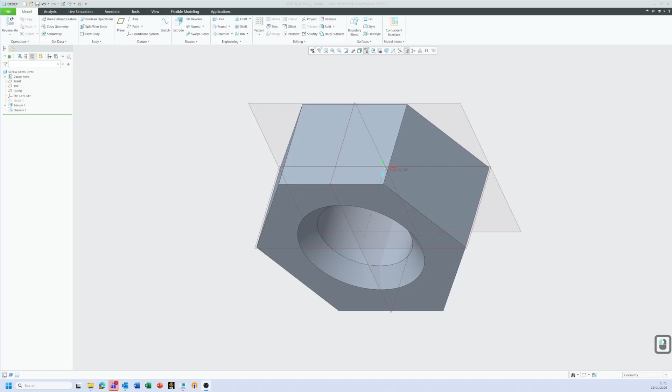Okay guys, so for this second part, what we're going to do is cut out an internal thread, and I'm going to make it match the first thread that I've done. So I'm going to use the same profile, same diameters and everything like that. But obviously this time we're working on inside of the hole for this nut shaped component.

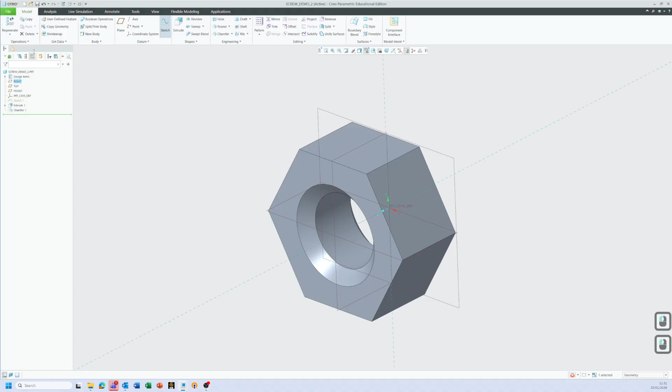Okay, so we start it in exactly the same way. We go to pick a plane, doesn't really matter which one we pick. I'm just going to click here, go sketch, sketch view. I need to draw a path for the helix to go along. So I'm going to start over here and come through to the other side. The length of it doesn't really matter too much, but I need to make sure I get this height right.

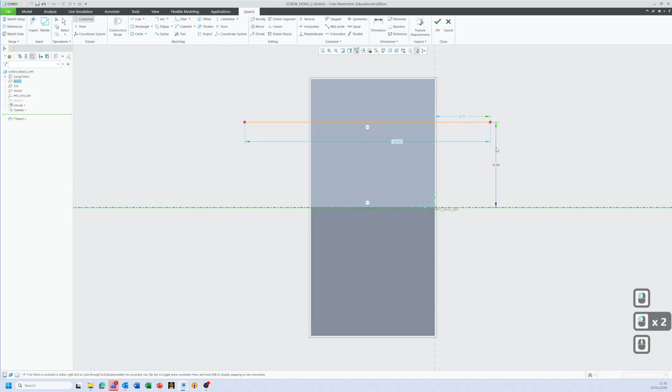So I want to put 10 here, so this matches the outside diameter of my external thread. And again, we're going to add a center line so that everything's ready for our helix. Click OK. And then we're going to go to sweep.

Helical sweep. You can see it's starting here. Change the pitch so it's the same, 5.

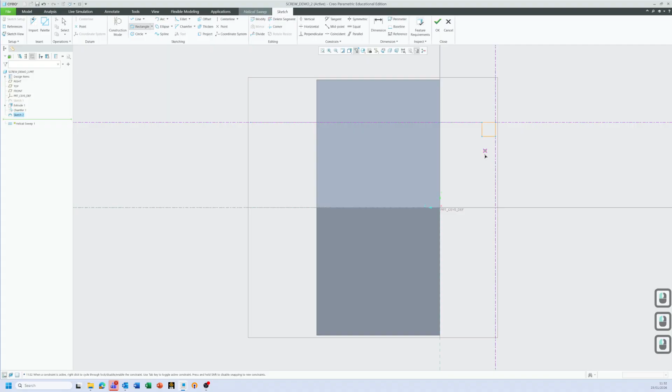And then we're going to sketch. I'm going to sketch our rectangle again. Okay, so we've got 2.5, so it's a perfect square. You see everything's all equal.

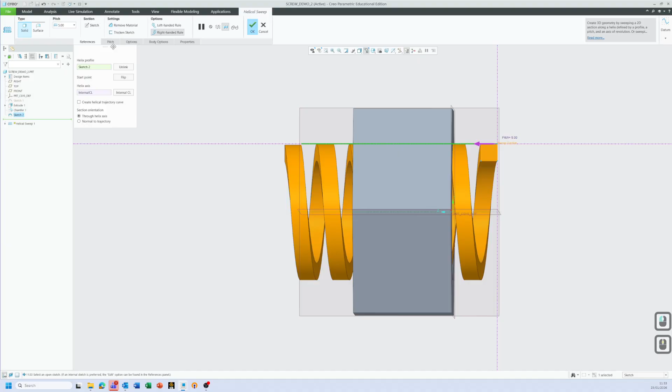And it's just going to cut away now from this hexagon nut shaped component. Click OK. Again, it's trying to add. Let's remove the material. We should end up with this cutout in the middle of it.

That's all good, but we also want to show the trajectory curve again. So I'm going to click on this. So it's showing us how that component is moving. Click OK.

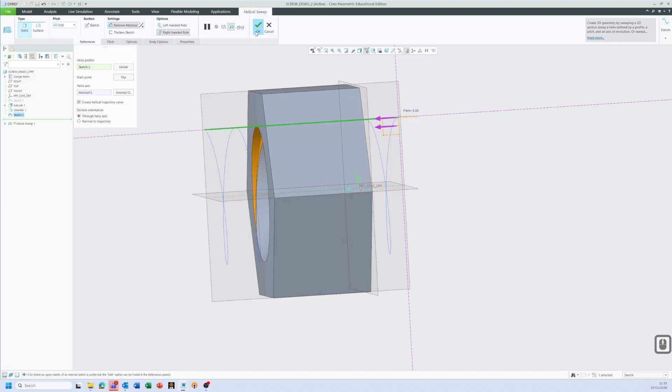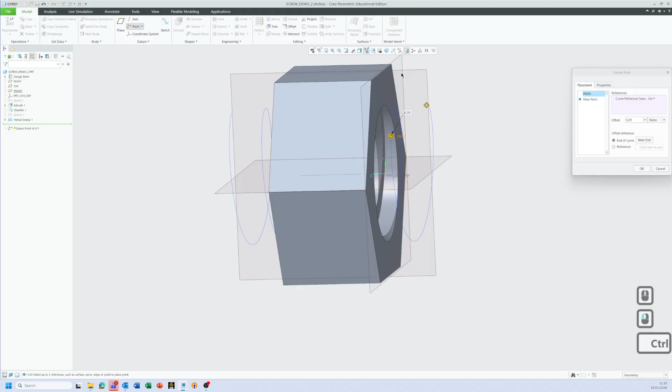And now to be ready to join these two components together, I'm going to add one further thing to this. So I'm going to click up here on point. The first thing I'm going to do is click on this curve. And then I'm going to click Control and click on this front plane here.

And so that will just give me a point that is on that curve and exactly on that plane. It will be useful for later on. So I'm going to click OK.

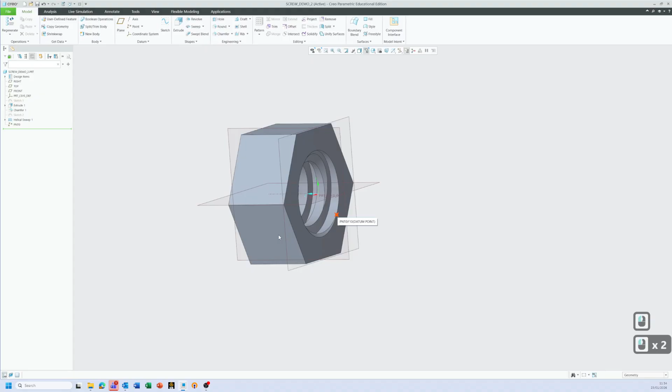You can see I've got a datum point there, and I've got the sweep path. If you want to hide the sweep path, we can do. We can just click on it, hide it. Don't necessarily need it now in this component, so we're just going to leave it like that.

Okay, so the next video we'll be having a look at is the assembly.